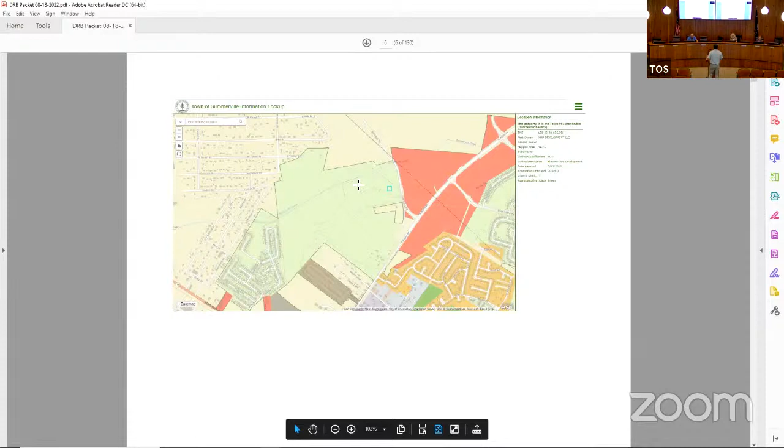So those were just a couple of observations. This is the overall location of the development. This is their information. I can turn it over to the applicant here for discussion.

Sure, so my name is Aaron Schmidt. I'm the project engineer, the project manager on this project. We're coming to y'all for final DRB. What we have here is the site layout. We've got it rendered out for you guys to show you the open spaces that we've done with the site layout. And then I can then turn it over to the architect who is zooming in. His name's Travis, for American Homes 4 Rent, and he can speak more on the architecture that's been updated on the townhomes.

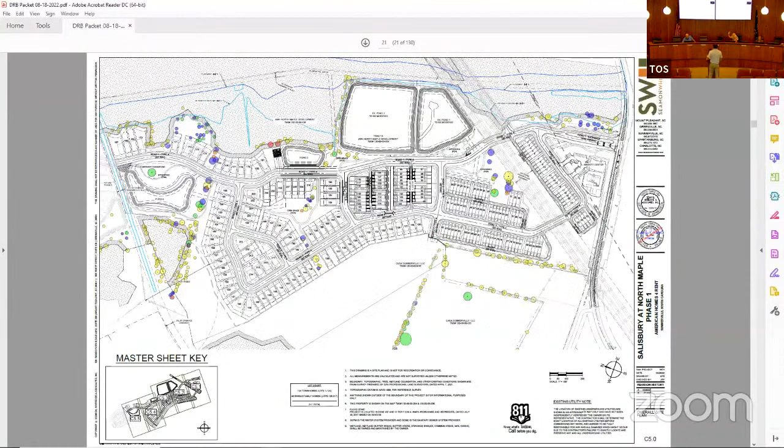Sure. Yes, ma'am. Yes, ma'am. Yes, ma'am.

So when you're coming in off of Old Dairy Road, there's a single lane that comes in and two lanes that go out, one that'll turn left and one that'll turn right. It's like a boulevard. What you're looking at, Candy, is the right of way that's through there. That's not the entry, the green. It's white up here. The amenity center is right there.

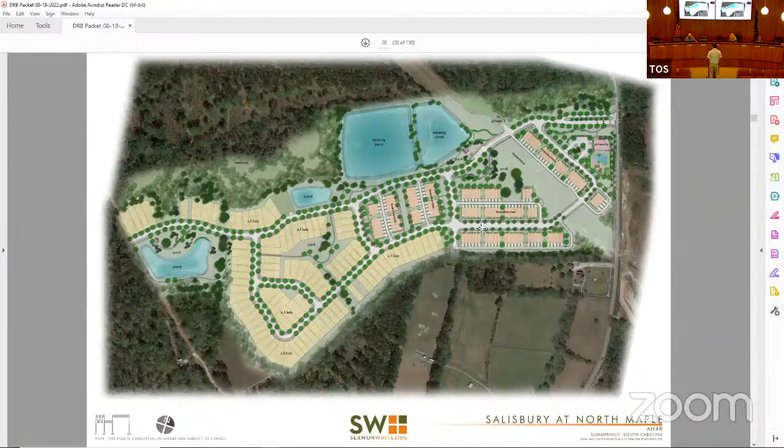And we can go to a site plan that shows it better if you want to scroll down. Go up one more there. So that shows more of the right of way and the roadway and how it's tying in as far as the entrance goes. Yeah, definitely.

So this is all site aspects. This is the planting right here, and it further defines the trail systems. We're doing a trail system around the existing ponds as well on the backside in order to allow people the opportunity to really capture this whole space and enjoy it.

As the ponds sit right now, there's already a built-up maintenance road around it that Mr. Bill Salisbury, when he owned the property, created. We're going to utilize that to just put a trail system on top of it to continue to enjoy these two ponds that exist right now.

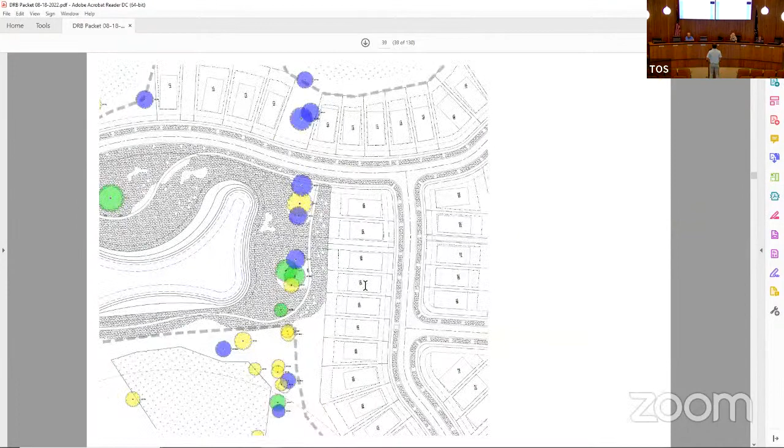It'll probably be asphalt, yes ma'am. And the reason is because we want to make this trail system ADA accessible, and one of the ways to make that ADA accessible is by using an asphalt surface. Yes, ma'am.

Do you want the townhomes or the amenity center first? We can start with the amenity center. Travis, if you'd like to go ahead and kick it off, we can talk through that and then he can explain the updates to the townhomes as well.

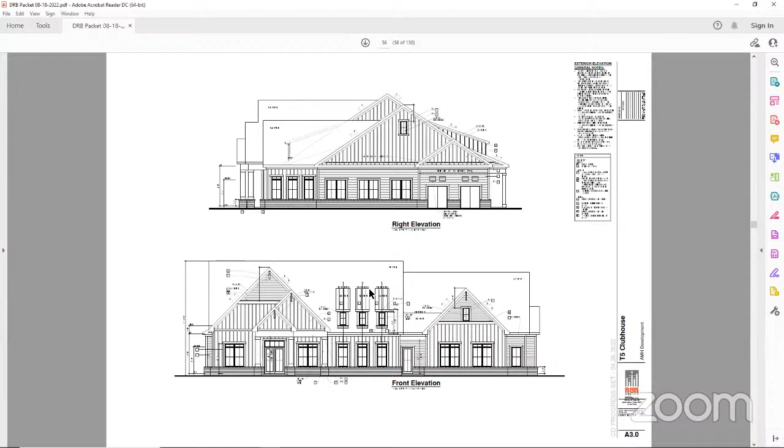All right, and this is going to be what our townhomes are going to look like. I just wanted to show, we have a sixplex, a fiveplex, a fourplex, and a threeplex.

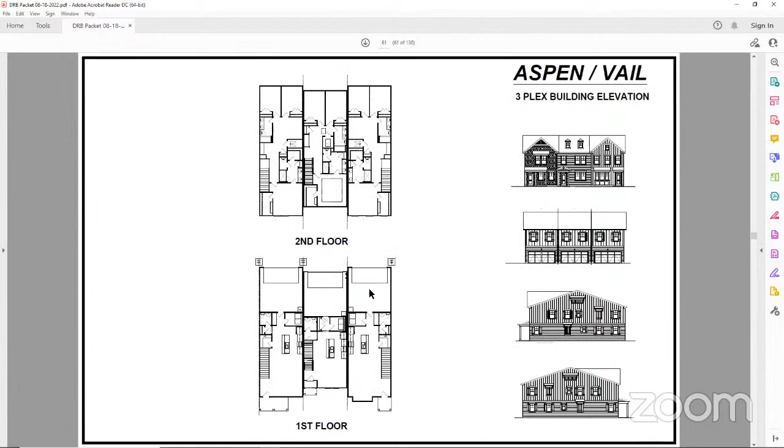Can we go to the next screen? Yep, that's your five. Just want to keep going. Yep, your three, and then here's a colored rendering of our amenity building.

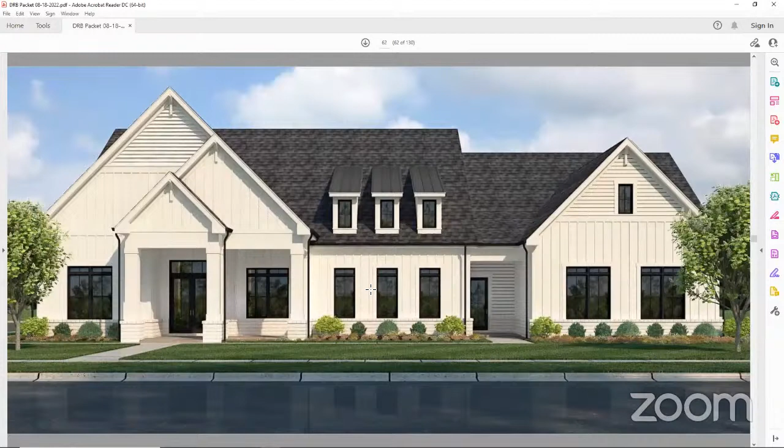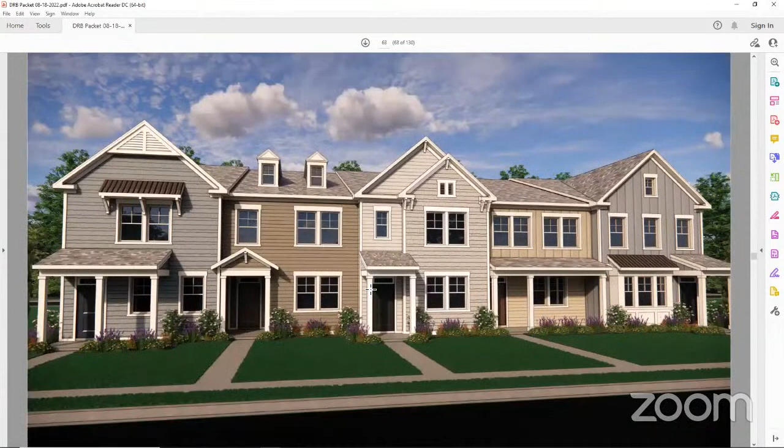Okay, so if you could stop right here. So last time we were here, we had a few comments and recommendations from the board, and so we wanted to show the new townhome design.

Let's start with the left unit. We added a lot more detail to the house. We provided a metal roof over the two windows, and we made that whole elevation shake. The porch has a nice detail with a vent that is now furred out 10 inches to give some depth.

I know some of the comments were that it just didn't feel like some of the Summerville towns. So we went and drove around and made sure we came back with that flavor, that design of nice, traditional but yet a little more transitional to give it a fairly new feel. If you look at the next unit, we have siding, and it's all cementitious.

We provided dormers to break up that roof line. Again, this porch will be 6 feet out, so every unit will have a nice sized porch as far as depth goes. And then the unit next to it, we provided some cool...

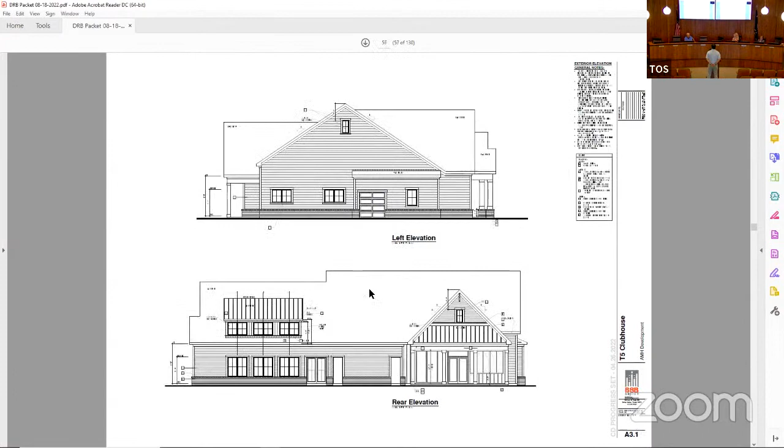For who and where, yeah. So that's white, keep going. There it is. Go one prior, back up. So I think Bill's question is, are those the colors? That's an old... the colors you see back there are part of what was originally commented on, actually.

And then American Homes 4 Rent took it and, if you flip to the next one, that's what they've updated it to. Those renderings of the amenity center and stuff were part of the fly-through shown at the last meeting.

Is this the amenity center or the end view of the townhouse? This is the new end-unit version that we updated to show more of the details of the townhouse. Yes.

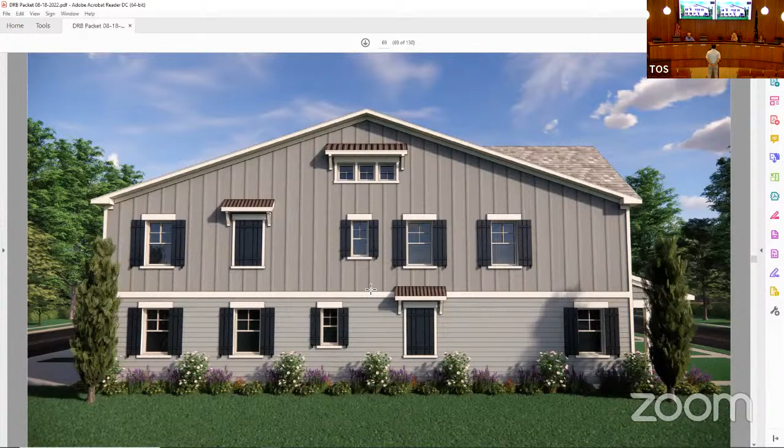One of the comments was that we needed to show a little more detail, so we added shutters that were right-sized to the window, and we also provided what we called a shutter clip, to give it the feel that it's not a real retractable shutter, but it gives everybody the idea that it could be.

So that clips onto the shutters also. We just wanted to show the rear with the carriage garage doors, and there will be shutters on the windows.

I'm a little confused about the roof colors because the amenities center roof, like you say Bill, is very dark, and this one is absolutely, totally the other way. This is a weathered cedar, I think. It's correct, it's weatherwood.

Well, I think the idea of making the amenity center different from the houses is a reasonable concept. So every building will have that roof color, all the townhouses will have that roof color, and then you've got some distinctness in each frontage. All the backs look just like this, correct?

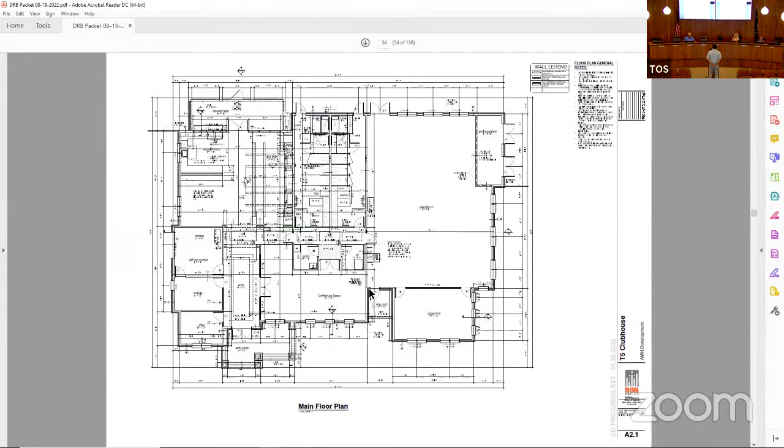Oh, and there's some right there. If you go back one more, you can see an overview of it. There you go. So you can't see it.

So the alleys are tight. Yeah, correct. So the townhomes are alley fed and they either face a property line that then has a buffer on it, or they face each other with an alley in between the two of them. Okay, yep.

But when we saw the color scheme a minute ago, none of the color boards that you show us have that light tan roof on them. That's what I'm confused with. Yeah, go to the color sample board. Before you move the slide, can we get to that?

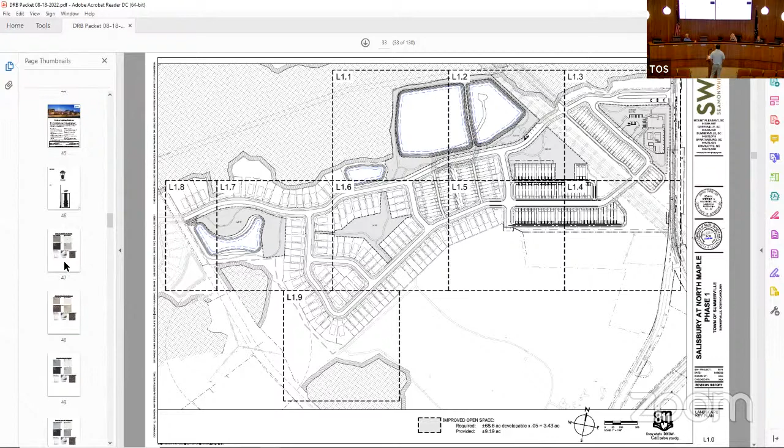Can we look at the row that's sort of diagonally on the electric easement? Which is the front on the upper, or is the- Yes, sir. So what you saw there, the back side of it, which faced the easement, that was the alley that faced the easement. And then the front of the townhomes faced the amenity center.

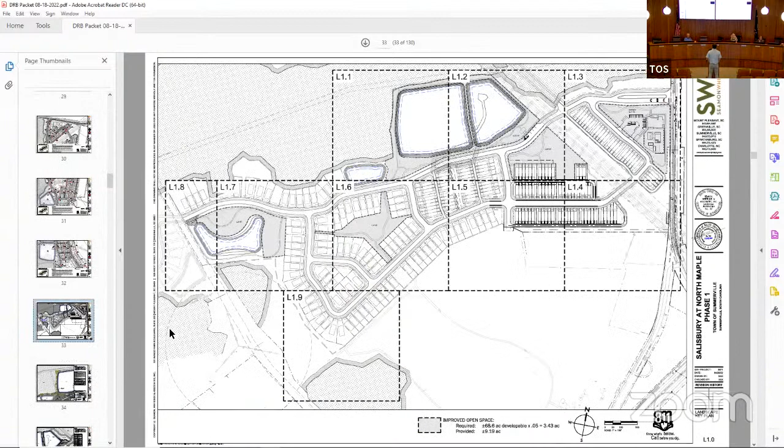So how visible is the back of that roof? If we look at the planting plan, you can see what has been done as far as plantings go, do you have enough to screen it? And I can actually allow Betsy to attest to that. Betsy is our landscape architect.

But there's some natural growth and stuff like that within the 125-foot power easement. Nothing that we're actually touching ourselves because it's outside of our limits of disturbance. But I guess it could be somewhat visible between the threeplex that you see here across the easement to the other side. When you're coming and going every day, you're gonna see that. Yes, sir.

And I was hoping there'd be some way of screening that, because the power company's gonna do what the power company's gonna do. Yes, sir. And you can't stop them.

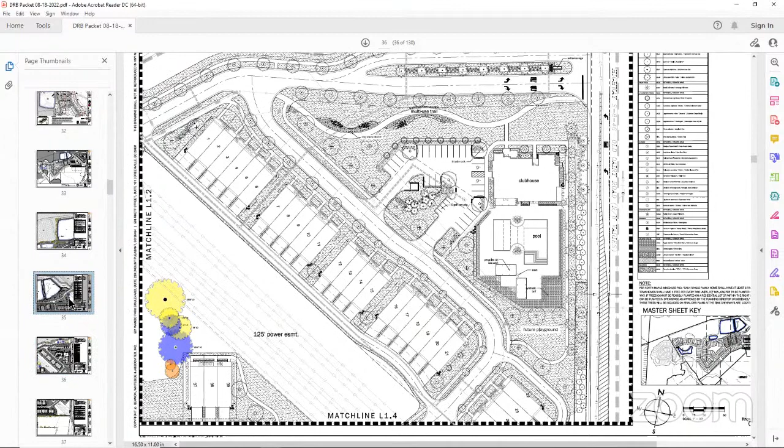Hi everyone, this is Betsy Ellingson, I'm a landscape architect. If you can go to the slide just before this one as well, you can see that there are some existing trees. You can see the yellow, the blue there, and you can also see those. So there are some existing trees, and we're also adding some planting, some lower planting or understory trees along that as well, so hopefully that will help break up the views to the backside as well.

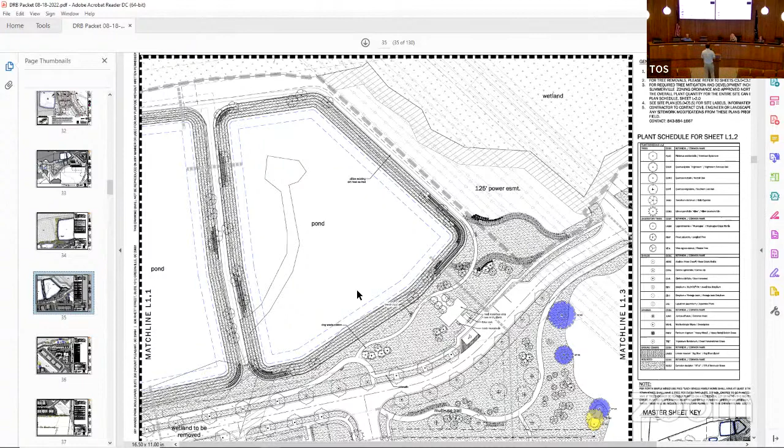I think it's one more slide, Tim. No. Yeah, I think it's broken up into those two slides. I apologize, but on slide 35 and 36, you can kind of see there on the bottom left. I'm not really seeing any planting in there.

Right, part of that was to remain whatever existing plantings were in there rather than kind of clearing everything out and replanting. But we do have some additional plants for our open space that will help block that view.

So what she's stating is the open space planned to the northwest of that threeplex will be planted. So when you're driving the main road, it'll break up the view towards the back of these townhomes. Now, when you're coming up the secondary road that loops around and ties into the amenity center, the only thing that breaks up the view there is the townhomes adjacent to that roadway, and the existing plantings and foliage that sit within the 125-foot power easement.

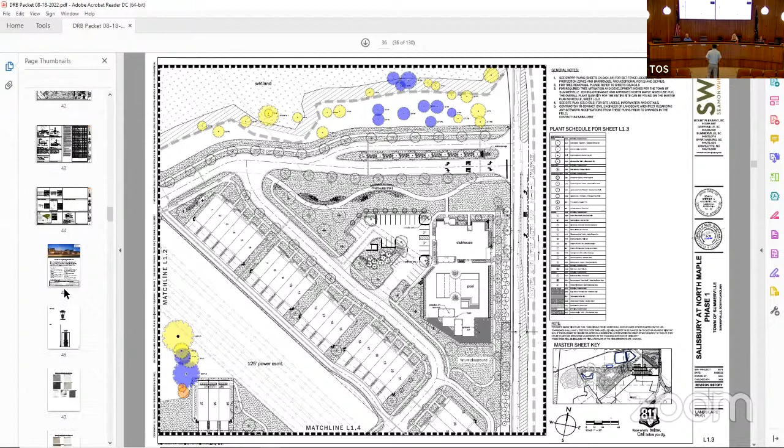Ready to move on to the houses? Let's move to the houses. To the townhomes? Is that what we're talking about? Well, yeah, do we review the individual residential houses? The individual residential, it's not the purview of this board. That's not our purview, I thought. Yeah Bill, just the townhomes and amenity center. That's all we worried about. Okay, yep, okay.

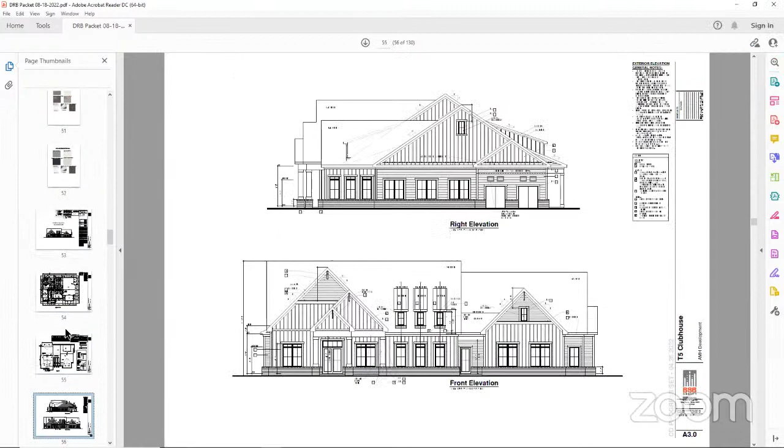And the last thing Travis wanted to touch on was the upgrade they did to the side elevations of the townhomes. Rather than just windows on the side, they dressed it up with shutters. It looked good.

I can't speak to the full architectural vocabulary, but does Chris Carpus have any comments? Yeah Chris, hey, I do have a few comments. What you got? He remuted himself. Yeah Chris, there you go. That's weird, alright, it says I'm driving but I'm not.

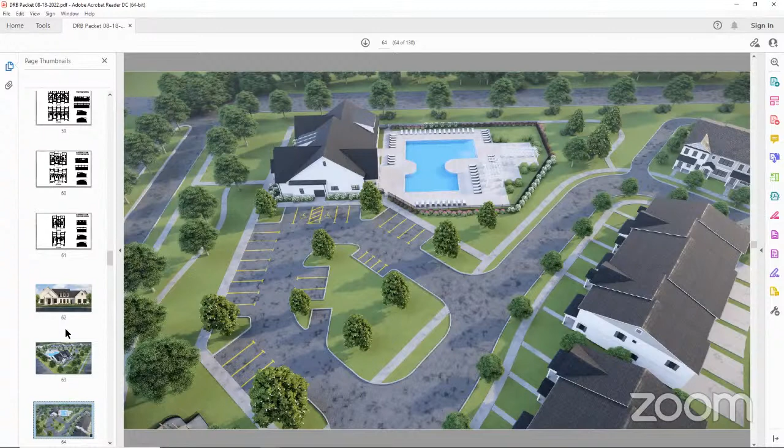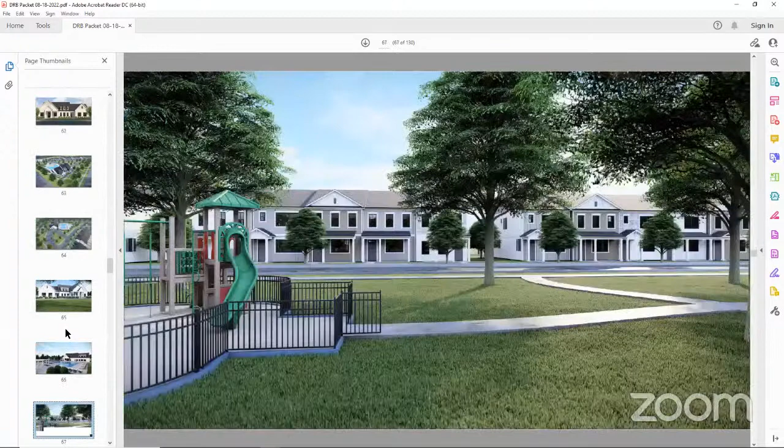So on the amenity center, I think it looks pretty good. I'm not really sure about the shed roof over the dormers on the front, it seems like a kind of long roof that I'm not sure really works architecturally. I appreciate the back side, I think it's on both sides, covered with metal, whereas the rest of the roof is just shingles. It's just a really long roof, and the building looks really good, and then once that catches your eye, it doesn't let go. I don't know if that's a great solution for dormers or not. Typically you'd see them as more of a punched opening rather than a large roofed unit, but I don't think it's a huge deal.

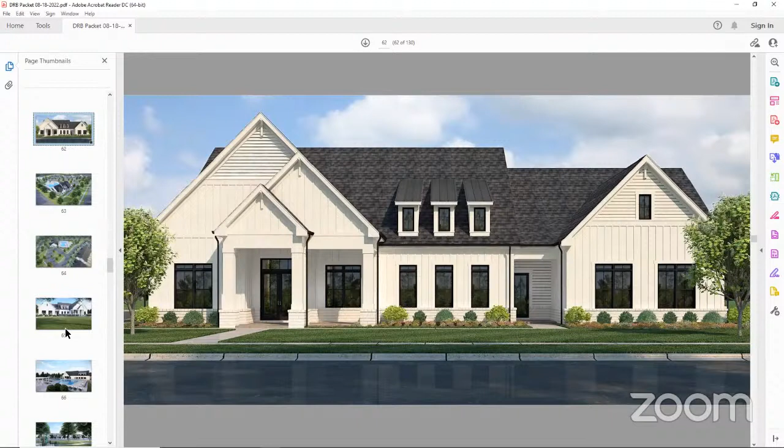That's my comment. I think it works better on the back where it's a single longer dormer than on the three individual dormers on the front. Maybe we just have a single dormer on the front like on the back. Yeah, I think the three are better because they relate to the three windows below. I don't really have a problem with the windows, it's just I almost think the one on the back can stay a shed. If you go to the back elevation, that does seem a little different, probably a 10-12 slope versus more like a 6-12. I kind of like it.

The back has much less detail than the front anyway. It's a nice look, but it's just incongruous with the rest of the building, and it's separated.

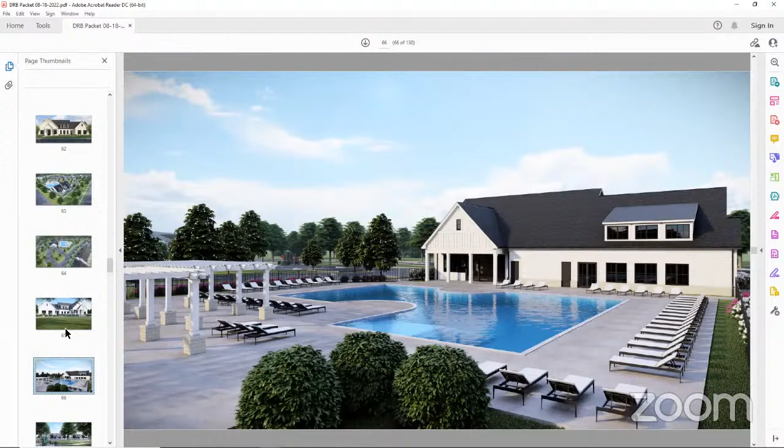So what are those shed roofs on the side elevation? What's behind there, is it just to close off part of a roof?

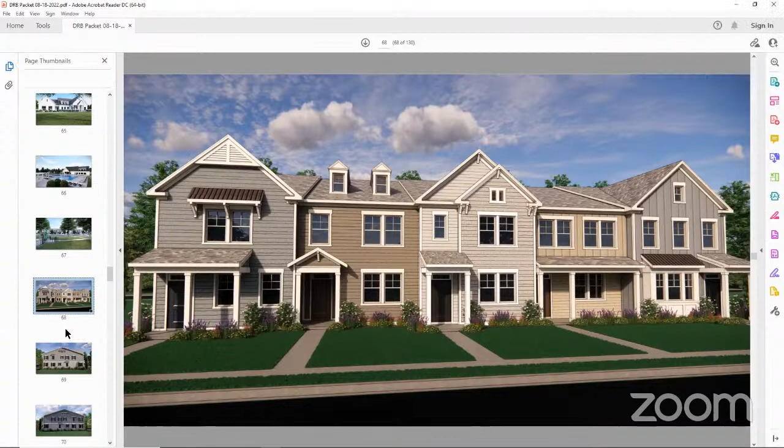But I just feel like, and I know everybody can't be a star, but when you look at the really great row houses in the US - Georgetown, Boston, and a few other places that have great townhouses, Charleston somewhat, but not as much - everyone has something special. Some of the original owners had more money so they did more stuff, but all the row houses have something. And I look at that and think, can you give them something - the dormers are a little bit of something, but that whole building is very flat. It's got the simplest, most, I'll say boring siding, because it's the same siding all the way up and down. It just doesn't seem to have anything. And that's my only real criticism of the design of those two brown units.

Just seems a little bit - I guess the one on the right center at least has a covered porch, that's a nice feature, a full porch. Maybe say, yeah, we've got a covered porch, but what does that poor other guy have that's cool? Well, they've got shingle siding, board and batten, and horizontal lap siding. No, I'm talking about the second from the left unit. Second from the left is lap siding, yeah, but it doesn't really have much - it's somebody's home.

And I think the trend I see is more and more people are going to be renting for life, especially if they have a nice rental. So this could be people in there for 5-10 years, having kids and everything else. I just feel that one unit is kind of like the dud. Can we make something nice for everybody? I think the intent here is to have all these different from each other. I mean, you could throw another porch up there, but then it's going to look like the fourth unit, or you could throw a metal roof over it and it's going to look like the first unit.

The intent is to have each of these look different. And in my opinion, having been to Georgetown, that second one looks very Georgetown-ish. I think it stands out and looks good.

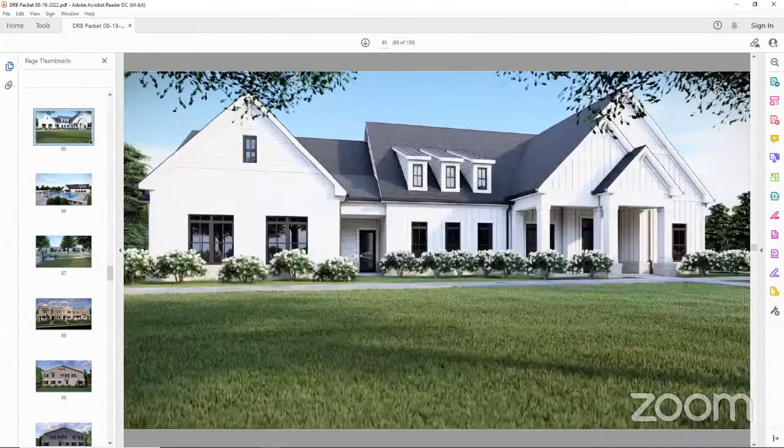So they'd have to be split units then, because there's no way you could use a package unit. No, they'd all be split, they'd have to be. Air handler in the attic and then condenser outside.

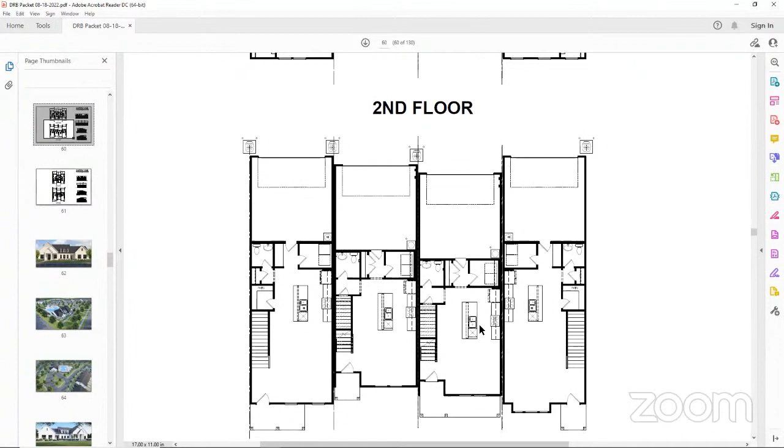Okay, and lighting in the development, is that going to be a power company function, or how are you going to handle that? So it's being worked through Dominion. We actually provided the American Homes 4 Rent selection as far as lighting is concerned. That's just kind of the breakdown of their program and benefits, but the lighting itself is what was shown on the other sheet.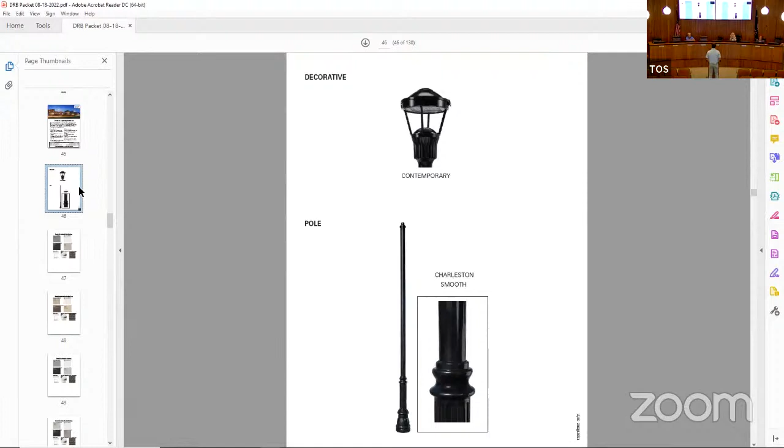The only other thing is the mail kiosk and bus stop that's provided in this package as well. Where is the mail kiosk? Can you show us that? I'll allow American Homes 4 Rent to speak to this, they actually worked with Mooney Design Studio in order to formulate this.

Go ahead, Travis. So we wanted to give something different and really fun for our customers, kind of a center point to congregate, hang out, and enjoy the space. You can see we have outdoor seating, we're going to be doing Trex wood decking so it doesn't ever rot, it'll look nice for years and years. We're also going to provide a little amphitheater seating.

And you can also see the mail kiosk, but this is more of a floor plan that points out what's going on. You can see the design of the roof gives it a little modern flair, something that will look nice in the community. We also put the lake back there so you can get that view. And you can see the design of the plexiglass that shields you when it rains sideways a little bit.

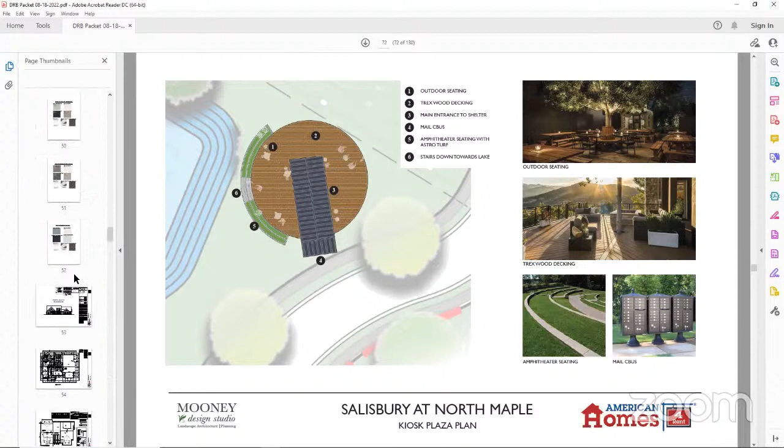I know I keep asking this, I'm just really trying to understand it. What color is the roof on the townhouses? Is it that light brown, or is it what you're showing on the cover? Right there, see the weatherwood? Weathered wood, so it's not brown, it's kind of a gray. Is that a true color or?

It's more like this one than that one. Each of these screens is different, every screen is different. Yeah, okay. You'd have to know what they look like to get an answer, because you can't get it from this.

And there's not really a great option with shingles. There's gray, there's black, and there's shades of brown. They make other colors, but they're really prolific in brown, if we're going with earth tone buildings.

It is very helpful if we have exact samples, especially for final approval. Yes, ma'am.

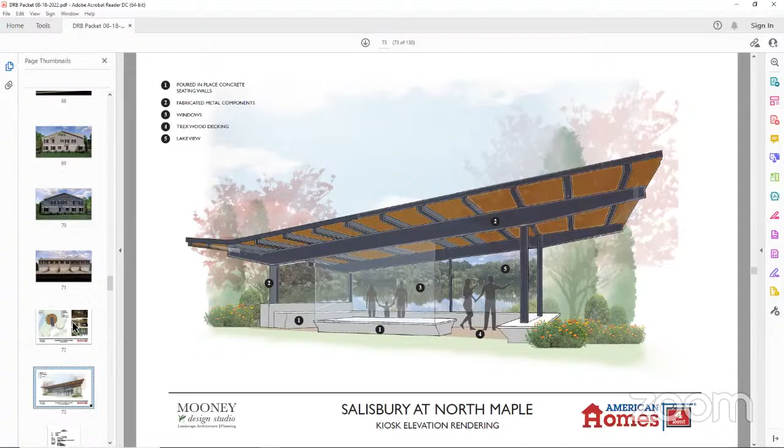They've been responsive, and it's not fantastic, but it's nice. So that's the basis of my motion.

So I seconded it. We're going to vote. Any further discussion? Ready for a vote? In favor, aye. 4 ayes, you have it.

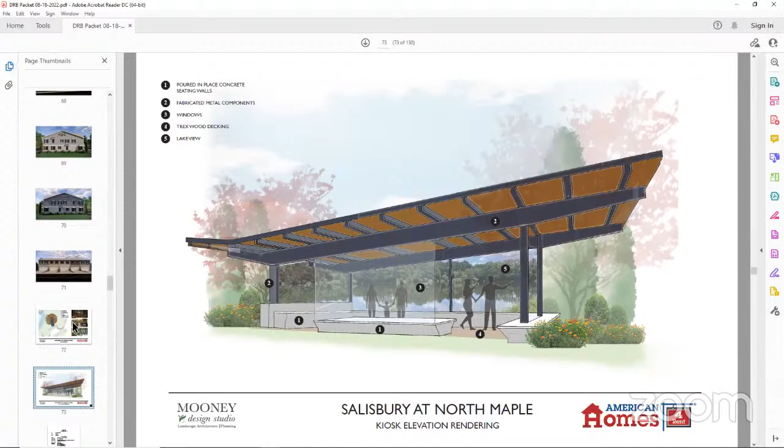Congratulations. Well, I appreciate the board for their time. Thank you, everybody. Thank you, board. Thank you all, thank you, guys.

Next, the second item under old business is a request for conceptual review of the Alta North Maple Street proposed 327 apartment development on 18.334 acres. This was, again, requesting conceptual review.

The property is zoned GB, general business. This was last at the board at the June meeting. Following your staff's comments, the site conceptually meets requirements. The proposal includes 327 units and 6 buildings, an amenity center and 8 garage buildings.

There are 525 parking spaces for 1.61 spaces per unit. Amenities include a pool, walking trails, and dog park. A grading and utility plan, landscape plan, tree preservation plan, tree removal permit, and full architectural drawings are still required. The conceptual architectural images generally meet UDO requirements and include a mix of materials.

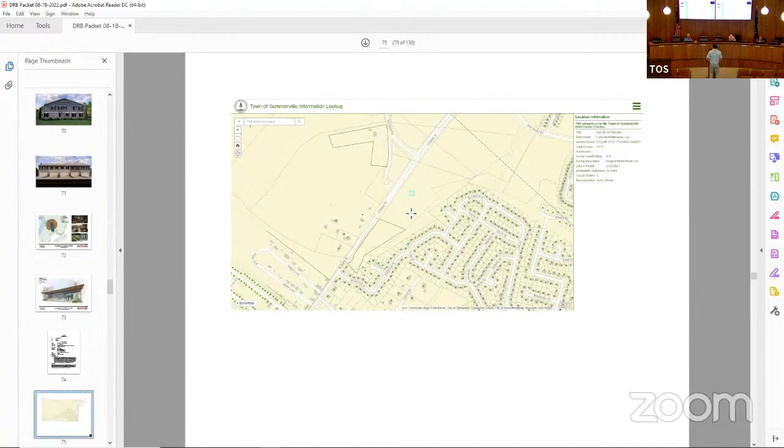Just give me a second. This is the general location, basically on North Maple Street, just south of Old Dairy, across the street from where we were just discussing. An odd shaped lot. Here's the render. So you guys are stuck with me again. This is actually across North Maple and down Old Dairy from the other development we were just discussing.

So we came to a conceptual DRB meeting back in June. Is that correct, Tim? Yes. And at that time, we received quite a few good comments from the board. So we took that and actually went back to the drawing board and really started to relay out this whole site. There is actually a site plan of what it looked like before within this set. And then we can flip back to this one just to show the difference between the two layouts.

Go back, keep going down. It might be right there. Yep, that was it. So this was the layout that we originally came to the board with, a very large 4-story building in the middle, 3 that fronted North Maple, and then a carriage style building that was also towards the middle of the site.

So we went back to the drawing board after hearing the board's comments, and we came back for another conceptual DRB because we really want to make sure that this development, we do it right, and we hear the comments of the board as we design this. So with that in mind, we can go back to the site plan. Betsy Ellingson, our landscape architect and land planner from Seaman Whiteside, between her and the architect, Mr. Glenn Allison with 2PA, they worked together to really come up with a site plan that we feel works a lot better on this site.

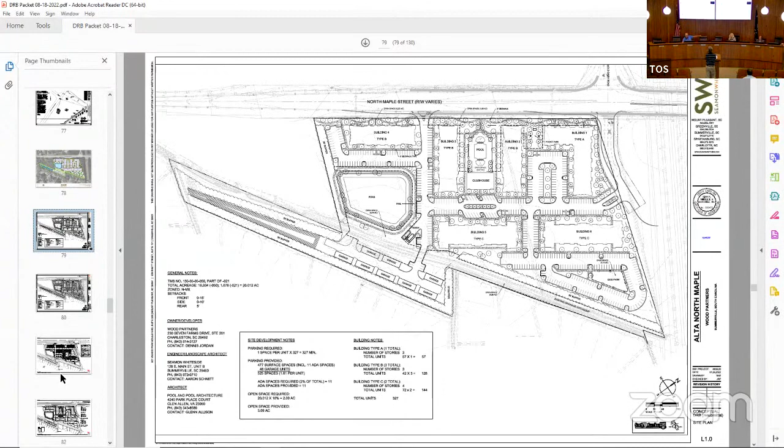Glenn Allison, I'm the architect with Pool and Pool. If you could go to one more up. Sorry, one more.

Okay, so as Seaman Whiteside said, this was the first site plan that we had, and there was concern about the size of the 4-story building, which is the C building here. So as Betsy said, we've broken that up into 2 smaller buildings, still 4 stories, and moved it to the back.

The other concern was pitched roofs on the 3-story buildings. So we looked at that and tried to come up with something that's a little more familiar in downtown Summerville. So we've gone to low slope roofs. And then...

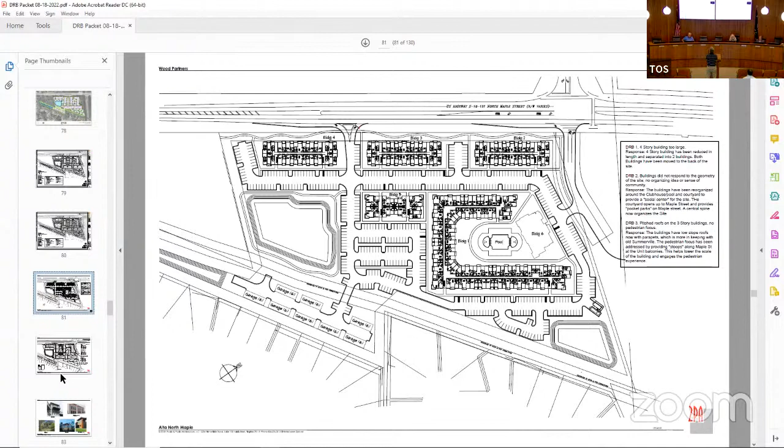The 3 buildings paralleling Maple Street here, there was concern about that. So in the new plan, we turned the middle one, or the two middle ones, in the new site plan, so the narrow end faces Maple Street and creates a pocket park. If you can go to the next slide, please.

And there you see, the other thing we've done here is, as Betsy said, was sort of anchor the corner with the L-shaped building. So buildings 1 through 4 are 3-story buildings, 5 and 6 are 4 stories, and then the club is about 2 stories, story and a half, in between buildings.

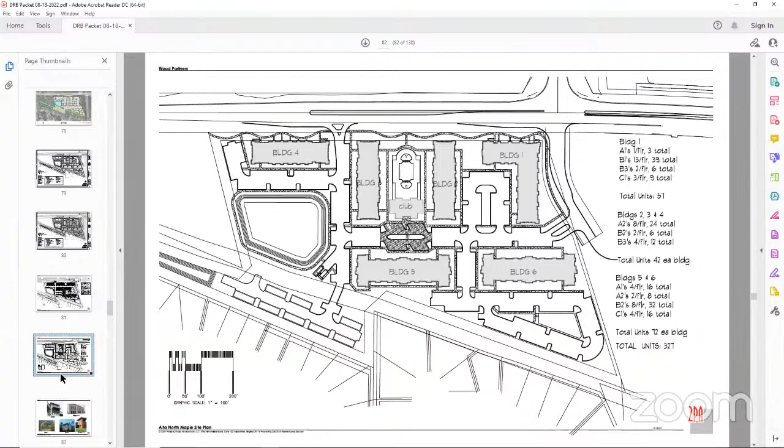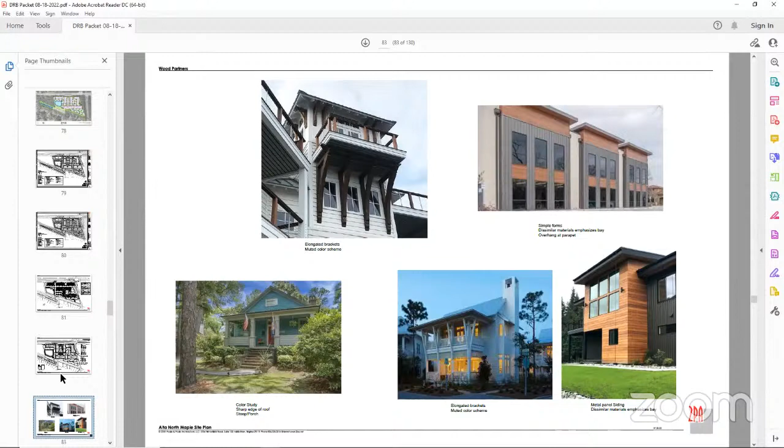Next slide. So just some of the inspiration in the bays, where different materials sort of delineate them, sort of a muted color scheme, and using different materials to accentuate the bays. Next slide.

So this is the perspective from Old Trolley Road and Maple Street. You see the corner building, the L building. And one of the things we've done to try and engage the street is create on levels 1 and 2 kind of porches, if you will.

And then as you go down the road, you see the narrow end of building 2 on this slide. And again, the biggest thing is the flat roof, so we've gone to a low slope roof, parapet line, and emphasize sort of the corner and midpoints. Again, trying to accentuate the bays and break up the buildings.

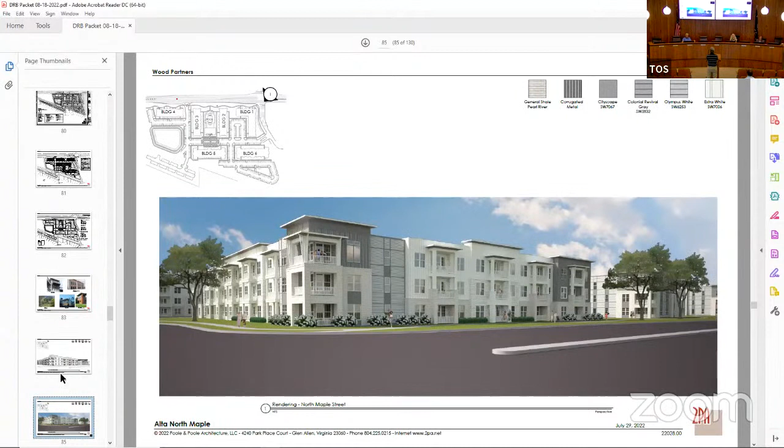Next slide. And this is just kind of an example of the muted color schemes that we're talking about, using sort of a dark parapet top to really accentuate the parapet. Next slide.

This is a perspective looking down through the pool courtyard at the amenity building with the 4-story building behind it. And again, this view here is framed by corner balconies, kind of addressing the street.

Next slide. Again, another just ideas for color. We're just asking for conceptual approval, so hopefully the next round we'll get deeper into colors and that sort of thing.

Next slide. This is the long building at the other end of the site from the L building. Again, just trying to create sort of 2-story brick to bring the scale down at the back, and accentuating the bays to break up the length.

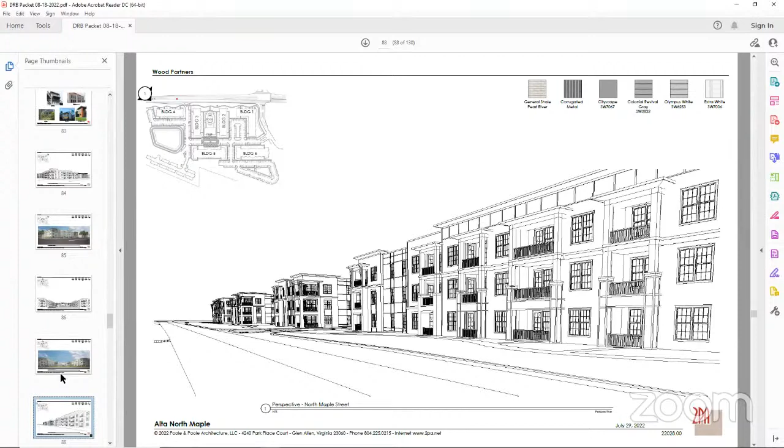Next. This is looking down the entry road with 4 stories on the left, and then the 3-story buildings on the right. The 3-story building is the end of the L building on the corner.

And then the same view, opposite end, standing close to the pond at this point. 4-story on the right, and then the 3-story clubhouse on the left.

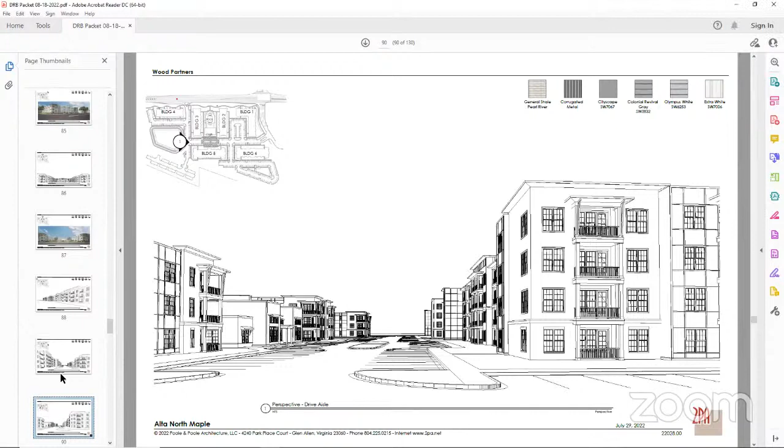And these are just elevations, flat elevations, showing the buildings as a whole. You can see the parapet's broken up, and then the expression of bays. We can go through each one of these, it's the same sort of vocabulary for each building. So with that, take questions or comments.

I think it's a huge improvement since the first one, which is great. I think from a conceptual approach, I like the look. I think you've got a lot of work to do to make it final.

But I think we could talk about some of those issues. For the rest of the board, it's an issue of do we want to go with what we might call contemporary versus traditional on this part of town. I think that's the right look. That's just my opinion. A lot of people would say no, this is an entrance to Summerville, make it look old timey. But I think this is more an honest expression that this is an apartment complex built in 2022.

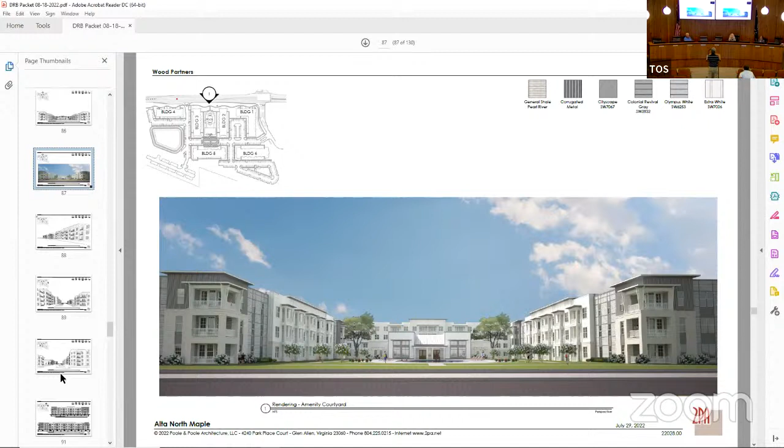Okay. Well, the pool is nice, but of course it'll be fenced for safety. I mean, we're not looking at the fence. It's big.

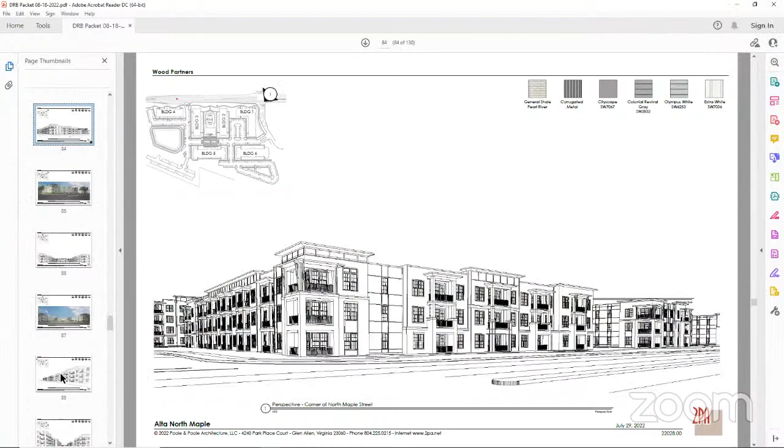Yes, there will be a linear park along North Maple with a walkway and greenery, so that will help as well. The setback from the road is about 30 feet from the right of way for that green area.

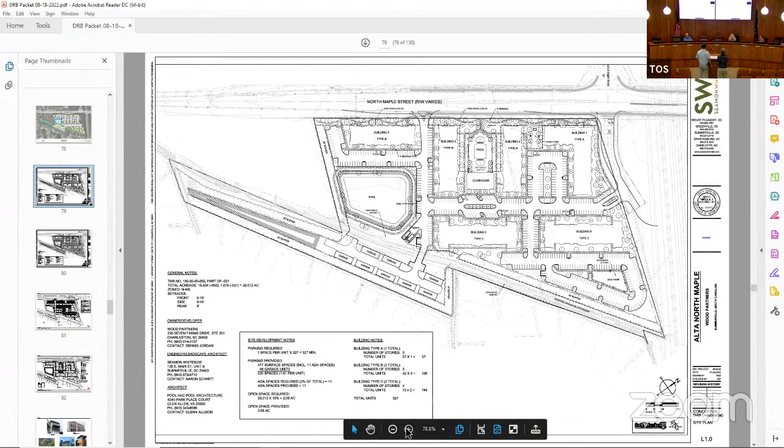Is this from the back of the sidewalk? Is the sidewalk in the right of way? The sidewalk is in the buffer - it sits within our property, within the buffer. It's about 30 feet from the right of way.

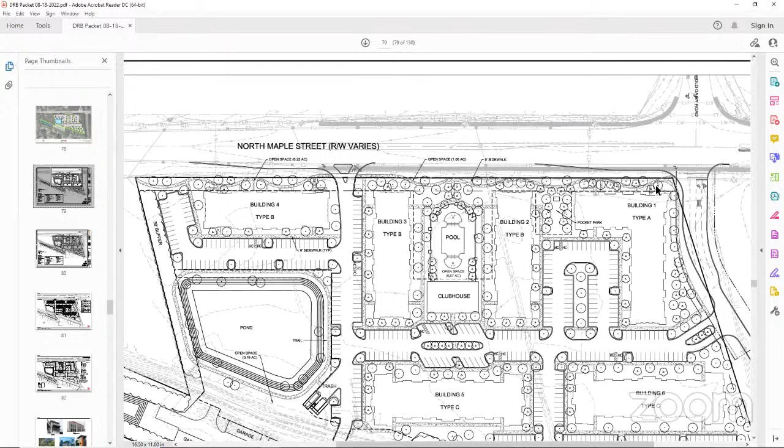So Maple Street will be 3 lanes wide there, correct? Or 4 - it's going to be 4 lanes all the way to Highway 78. So what you'll see is 4 lanes.

I don't know if they should extend that 12-foot wide walking and bicycle lane parallel with it - have you accounted for that? We're aware of the widening happening, and we're working with the town of Summerville on how this development will tie into that. The objective is to allow this pocket park to be part of the sidewalk or path that will go up and down.

Right now on Nexton Parkway and North Maple Street, they have a 12-foot bicycle walking path, all the way, not just parallel. I would expect that would be part of the 4-lane widening when that happens, continued all the way down to Highway 78. But I don't know that for sure. Yes, the path - I'm not sure which side it's on.

Is it on both sides? No, I believe - and I could be wrong, I'm not involved with that directly - but I think it's usually a path on one side and a standard sidewalk on the other. They might do two 10-foot paths on both sides. That's something to look out for, to get that 12-foot asphalt bike path, walking path tied down.

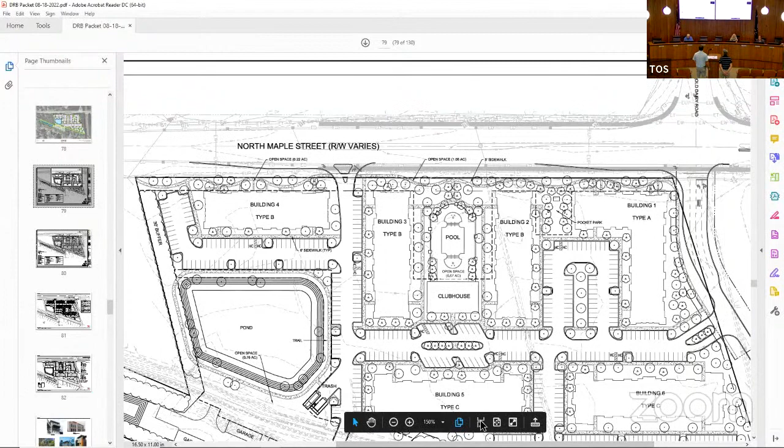If you go back to the courtyard perspective showing the swimming pool, when I looked at the back of that, it seems like that parapet's going up and down against the skyline - it's a lot more interesting. When I'm looking at the buildings on the side, it looks like just a straight line, no up and down like you have in the back. I think that view to the back is more attractive because it looks like something is coming towards you and something is set back - it's a lot more interesting.

Greg, we're looking at the 3-story building behind the pool, the amenity center too - that one is a street away that we're looking at. But the point I'm trying to make is it's not a continuous just line of parapet.

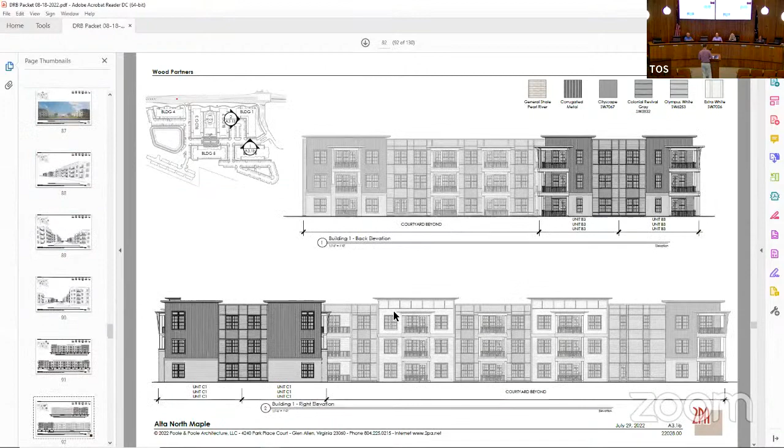So the first item under new business is, as Bill pointed out, 309 North Maple. This is a request for preliminary approval for a new multi-tenant commercial building, flex space. The property is zoned LI, light industrial. It's currently a vacant office building, and this is their first time in front of the board. This is the location - the old West Rock office building that's been vacant for a good while, as long as I've been here. Sawmill, so on and so forth. At this point I can turn it over - I should probably give staff comments.

Right-of-way acquisition for North Maple Street improvements have already been taken and all required front buffers are applied correctly. Sidewalk will be installed as part of the Maple Street improvements across the entire frontage. Proposed landscape materials meet the minimum planting size requirements. There is no minimum parking requirement for this type of proposed use, though other commercial retail uses are permitted in LI zoning. There are 107 parking spaces proposed for 54,000 square feet - approximately 1.98 parking spaces per 1,000 square feet, which is very close to the general commercial/entertainment requirement of 2 per 1,000.

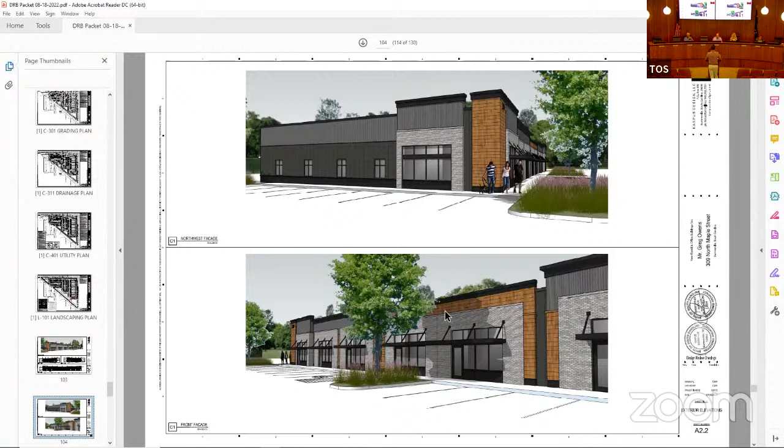At the top of this slide, you'll see we're addressing the side elevation of the building, which I think is important in context along North Maple, adding a glass storefront there and additional brick enhancement along the sides. We're also carrying some additional metal paneling along the back, along with windows to further address the side. The corner of the building carries that wood accent both on the front and the side. I understand it's important not to leave a blank facade on the side, and I think this does a good job creating the side and bringing it into the forefront of the project.

Next slide. I mentioned earlier the variety of materials you'll see at the top of this slide. It gives you also a direct head-on perspective of how it would look from the streetscape. The materials are indicated there at the top, as well as those that are in the rear.

I'd like to orient each of you to this site in that there is no through road behind this site. There are only adjacent property lines to the rear, so there's no cars other than those tenants in these buildings that would go behind this site in terms of through traffic.

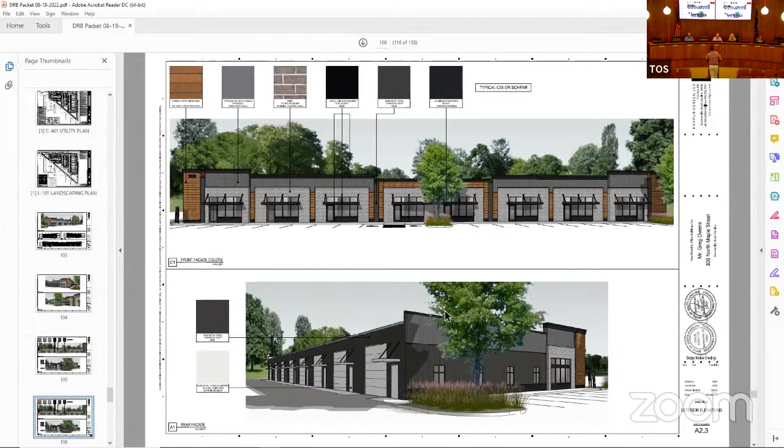This is where that old wooden building is. Is that the same site? It's brick. What's on there now? It's been used by the fire department and the police department recently for exercises.

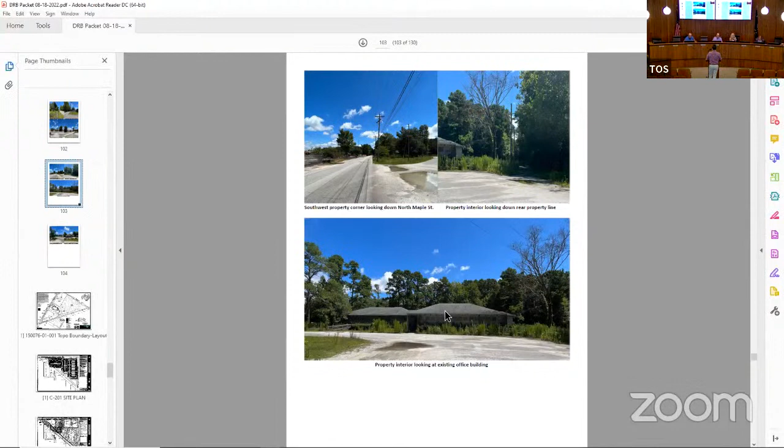And can we look at the site plan again, just to make sure? So that building is where the long vertical building is? Yes, sir. Essentially, immediately over top of it.

And then are you bumping out into, it looks like the building on the left is... Well, the site is actually an irregular shape, so that's still part of my property. We're not encroaching on other property.

Is that a power line that runs at an angle along your rear property line? Currently, there are 2 utility poles on the rear of the property line.

Tim, can you zoom out one so we can see the context a little bit? So the existing building to the north of it, is there a lot of vegetation that hides the back of the building currently? And will it be staying there? Currently there's vegetation, quite a bit all the way through here. But it's going to change as it is sold and developed.

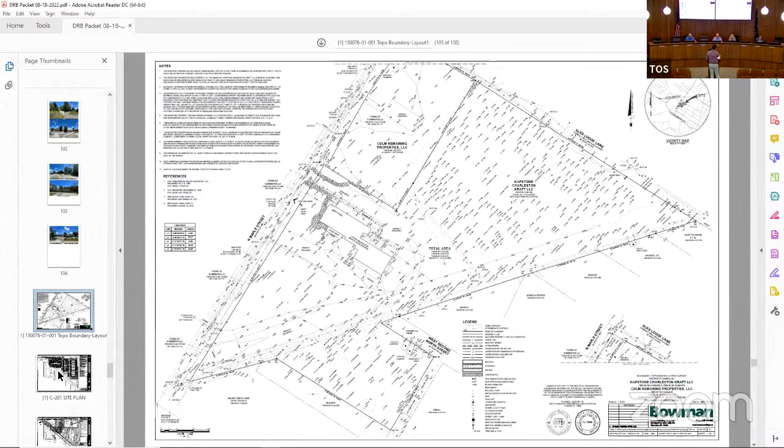Is there an elevation, a Maple Street elevation looking at all 3 buildings together from the street? Let's look at that. No, so my plan with this project is the building I'm showing you is the building that fronts North Maple and is parallel to it. The idea is that the first building on the left will be different than the 2 that are perpendicular.

And given the process of leasing tenant spaces, I'm not building all 3 at the same time. My intent was to come back to this board and seek approval for the design concepts for the second and third buildings. I've had discussions with my architect, and our intent is to carry forward the design schemes from the first building, but there are limitations since a building that fronts totally and one that is perpendicular will have different design cues and material schemes simply because they're different.

But you're just looking for approval for the one on the left, right? Yes, sir. And this is conceptual? Preliminary requested, so there was no conceptual, okay.

It's going to be difficult to get away with that rear elevation on the next two buildings. You can probably get away okay on this first building, but the second two, probably not. Yeah, can we look at that? You're gonna have to dress them up some. Yeah, can we look at the elevation again?

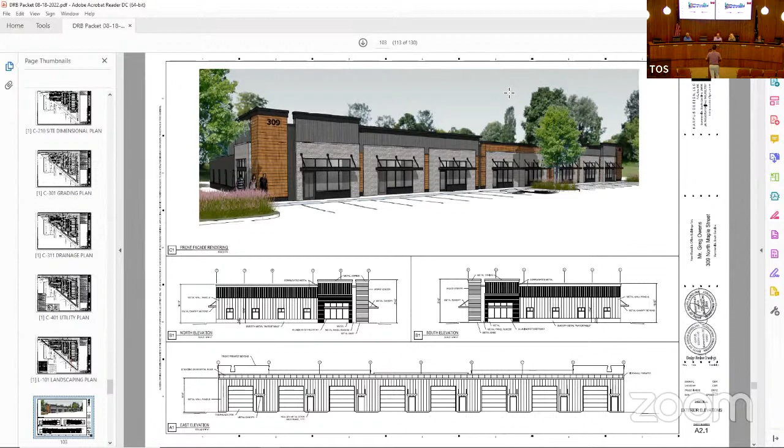I think the major issue is the site plan. I like the building, but the site plan is my major issue - I'm having trouble seeing those other two buildings without major changes. Let's talk about that for a second. Tim, this is really a question for staff - what you're wanting is to get phase one approved, sounds like. That's it. So if all we're doing is phase one, then these other two buildings we don't really even need to comment on.

We can give you conceptual comments on that, but you can't do those. You can't clear the whole site - I suppose you could take the building down, but you can't, unless maybe you're not intending this, but you can't develop the whole site and then plug those two buildings in on the right later. You can build all of it later, but you can't clear it and have the pad ready.

That's my understanding. Well, I didn't even realize this was only the one building. I was under the assumption, based on the application, that we were talking about all three, and that the architecture would just be expanded across all of the buildings.

We don't have a phasing plan here on this site. Obviously, most likely what you'd have done is the site would be cleared. The actual office building is located right here right now. Then this is a lot that will have to be consolidated with the rest of the property. And this is all just kind of wooded currently, these two on this side.

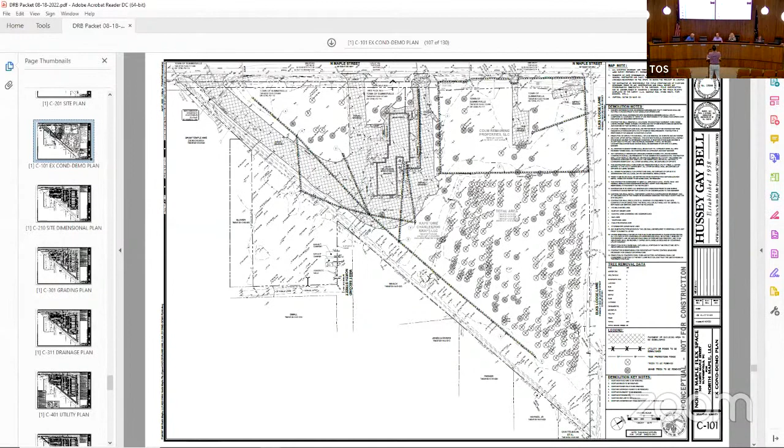My idea was that I hate to see you waste all this land back here - that's a big rectangle of land back in there. Well, what I'm trying to do, being flex space, you don't need frontage like you do for retail. So you could go in 90 degrees off the road and utilize that land. Sure. I'm also trying to be sensitive because I do have tree protection I need to address too, and I'm trying not to clear cut the site, and leave some trees and some buffer there.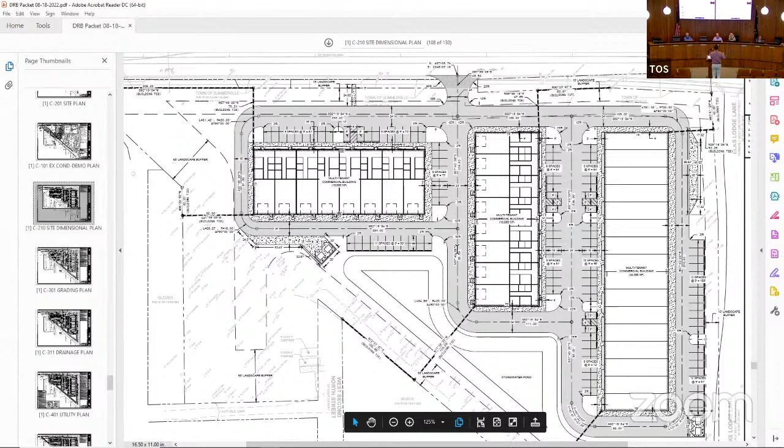To my earlier comment about the buildings - the first building and the second building are going to look different. So rather than come in here and talk about three different building designs, I mean we're trying to just get one nailed down first, understand the spirit of the committee. Then when it comes time to look at the second one, you guys can look at the first one in the built environment and say, I like that, or I would do this differently. Then when we go to do the second building, we can make those adjustments and provide a better product going forward.

Also, buildings 2 and 3 orient perpendicular - there's only 75 feet of width proposed, so there's not a lot of visual massing you're going to see when you're driving. And keeping in mind this is going to be a 35-mile-an-hour street, I mean when we drive even at that speed, we're not looking like this.

Okay, our sight window is very narrow. I'm not saying people aren't going to see the buildings, but unless you're standing in front of them, you're not going to notice them driving by. Maybe you take a glance and look back.

I think that's why some parts of Summerville look like they do, because they were designed based on the vehicle. We're trying to turn the clock back 100 years and say buildings are designed for the pedestrian. When you design buildings for a pedestrian, they become successful places to live and work. You can see that all across this country, and all across Europe. When you look at communities based around the car, nobody wants to live there.

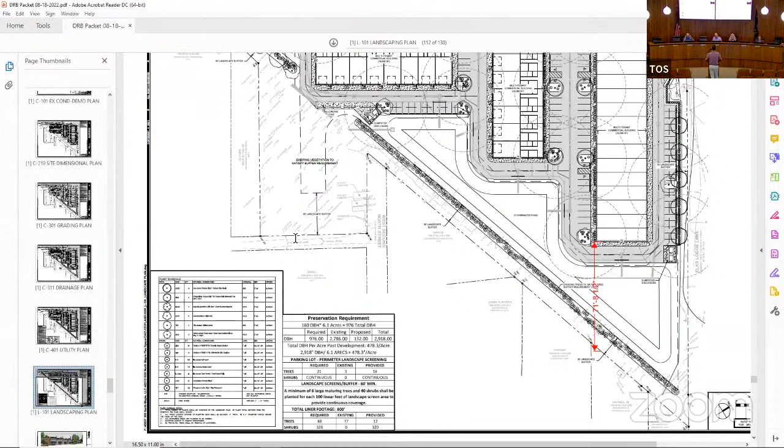That is more of a driveway, to tell the truth. That's never been installed. It's public, and that West Second North Street is not navigable. You can't go up and down that either. It's not extended either. It makes no connection.

My point is it's really a remnant right of way, left over. It was dedicated, but it was never improved. So it's not abutting residential, it's abutting public land.

But these properties here are residential, neighborhood residential, neighborhood residential, neighborhood residential. I'm specifically talking about on the left.

And they're able to maintain the 60 feet over here, 60 feet, 60 feet. This angled section, where they are directly abutting the neighborhood residential, that's where the reduction comes into question, from 60 feet to 30 feet. Anybody got any heartburn about that?

Think we can negotiate through that. Yeah.

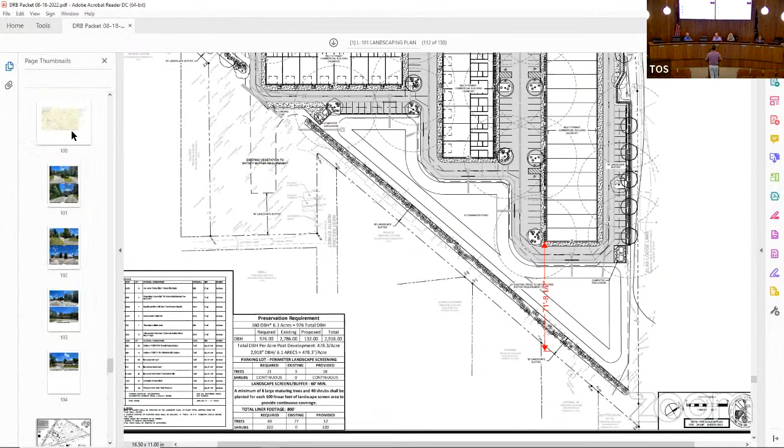I would just ask—this doesn't have to be answered today—but verify that the 60-foot requirement on the left side is actually required there, because it's technically not on... Why would it need that? Yeah, it's based on the zoning.

So if you look, this is the section you're talking about, from our map. You've got Elks Lodge Lane, this is West Second North, that would be extended through. This is, as I said, a remnant right of way that has a building in it, a connection down to First. It's not really anything, it'll never get improved. So neighborhood residential, neighborhood residential, neighborhood residential—that 60-foot buffer is required in that odd notch out.

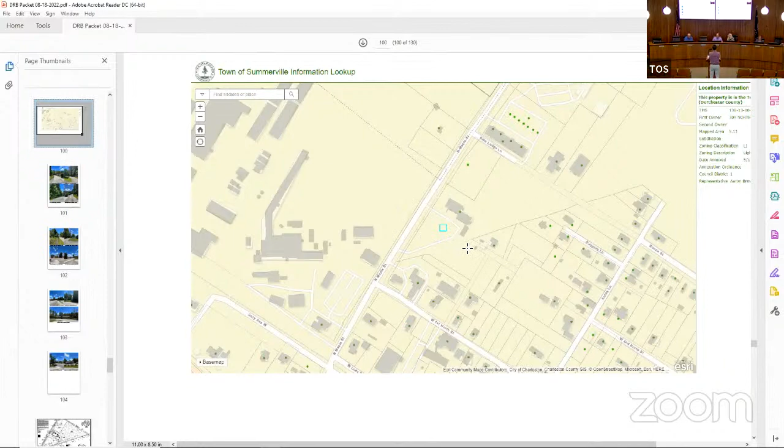What else? These are all public buildings down here. Church, community center, youth centers—they're not residential. I mean, they're zoned residential, but they're not.

All right, so we gave some tangible comments. A 30-foot buffer is fine, I think, to everybody. What else do we need to talk about?

I like the project, I like the use, I like what it could be to the community. I don't like the facade, as I've mentioned. I think you'd be better off using some wood, relate to the timber mill, acknowledge the timber mill, go with something that's light and happy and fun.

Any other comments? Okay, so we need to make a motion for preliminary approval or denial.

I'd make the motion for preliminary approval based on the comments, which means there's a lot of work to do on building elevations primarily and landscape.

What do we do about these? They're off the record. We're not doing anything with those other buildings.

Is there a second? Second. Okay, so further discussion.

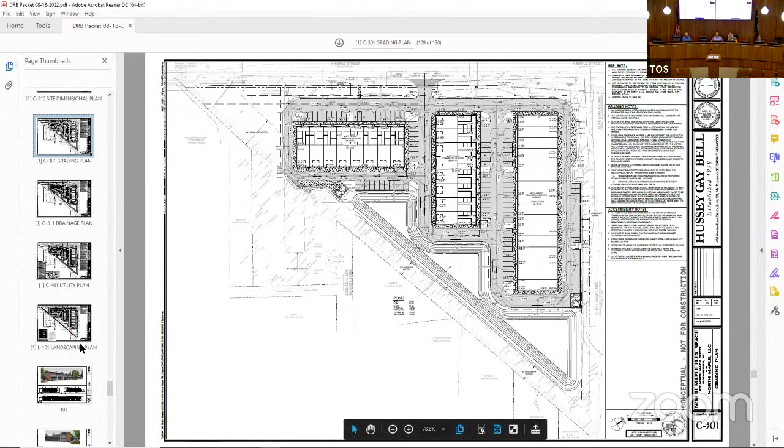No, this is a request for conceptual review, so we do not need a full quorum to actually do that. So you guys can provide your comments, and because there's no vote, it's fine.

As just detailed, this is a request for conceptual review for a proposed new two-story office building on 0.3 acres. The property is zoned DMX, downtown mixed use. This is located at the corner of East 3rd North Street and North Gum Street. This is currently a vacant property, and this is their first visit to the board.

A landscape plan, tree removal plan, and a photometric plan are still required. Parking is not specifically required to be provided in the DMX zoning district. The plan does show 14 parking spaces. Parking cannot be located in front of the proposed building.

The building is within 1 foot of the 3rd Street right of way. The proposed building meets the 35% frontage build out requirement on both the Third Street side and the Gum Street side.

Building materials include aluminum storefront windows and doors, standing seam metal roof, brick, hardy plank siding, and cast stone. Colors shown in renderings are in the packet. Due to the proximity of the building to the street, no ground sign is permitted. Wanted to throw that out there.

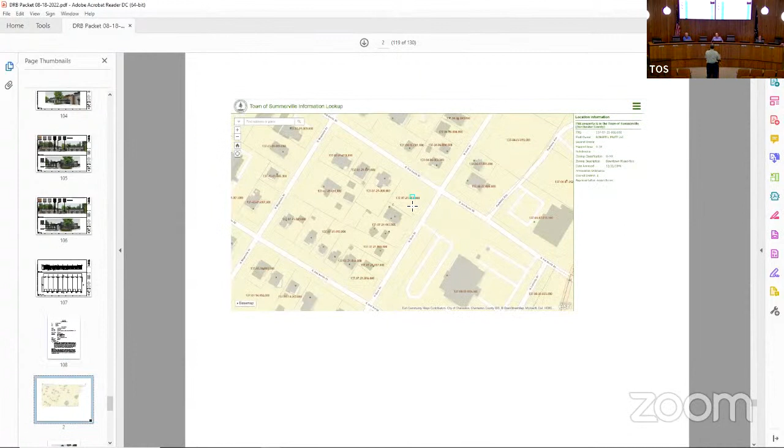So the next four-way stop heading toward Main Street is the Perpetual Restaurant with the food truck beside it. Okay, so we're on street headed to the Berlin G. The bank is pretty far away, so on North Gum there. Yeah, but so it's behind.

East Third. Right. So if you're turning at between the bank and Coastal Coffee Roasters and coming down, after going through the first four-way stop with the restaurant past Night Law Firm, then you've got a second four-way stop before you get to Berlin G. That's that corner on your right. I know it's kind of an invisible corner.

No, nothing on it, it's vacant. Nothing on the site. Yeah, shady corner, Dorchester. Yeah, there's a building there years ago. It was torn down. Dutch Slingers.

So it's across from the post office. Yes, yep, yep. Okay. Well, I've seen you around. Yep.

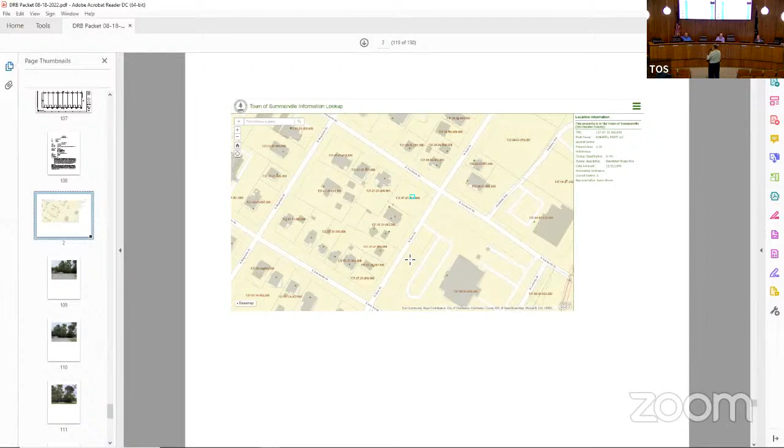That being said, a tree might be an issue. You might have issues with trees. I don't know, well, how do we make this simple? Let's get this over with. If we could go back to the old plan, I mean, leaning on Kelly. Well, you might want to let him talk then. How about we go back to the site plan?

Let me just get back to something that was said 10 minutes ago, because those buildings to the left are set back because the zoning said you shall have a 30-foot setback to the right of way. They're not there because that's what old houses used to say, or cottages. So we always threw away the front 30 feet of a piece of property to create a setback.

Well, the only way you can throw away 30 feet is if you use the next 30 feet to put your parking between the road and the building. And that's how that works. So if you pull the building to the front, you can park behind.

On a corner lot, the issue we've got here is if I pull it to either street, my 'behind' is the other side. So the parking is going to be up against the street on the other side. So the farther I move my building to the top of the page, those 4 parking spaces on the left side go away because they can't be forward of the building. So the more I do what makes sense, the fewer parking spaces the lot gets.

And how many spaces do you need? I know that's hard to predict because you don't know exactly who your tenants are going to be, but you are trying to do a lot of stuff on a small site that has a huge tree. First of all, the first 3 - because if I don't get a variance for that 4th space on the left side, the first 3 are replacing 3 that are existing on the lot next door. Okay, so those aren't even ours.

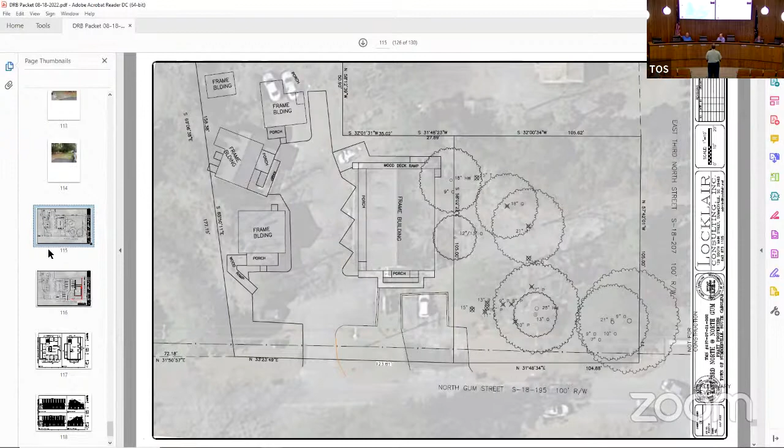If I'm being honest, I don't really like the layout, but I'm not gonna push back on it because I don't know what else you can do. I mean, that's the truth. Do I like where the building is? Not really. But you have to have parking in there - you have to have that much.

My concern, Chris, is they're trying to put too much on the site. And if there's fewer parking spaces, you'd have more flexibility with the building. How many square feet is the building?

Well, as you push the building up, you're eliminating the handicap spaces, and that's moving up, because the building bumps out there, so that starts going away. You got it single loaded. How many square feet is the building, Elliot?

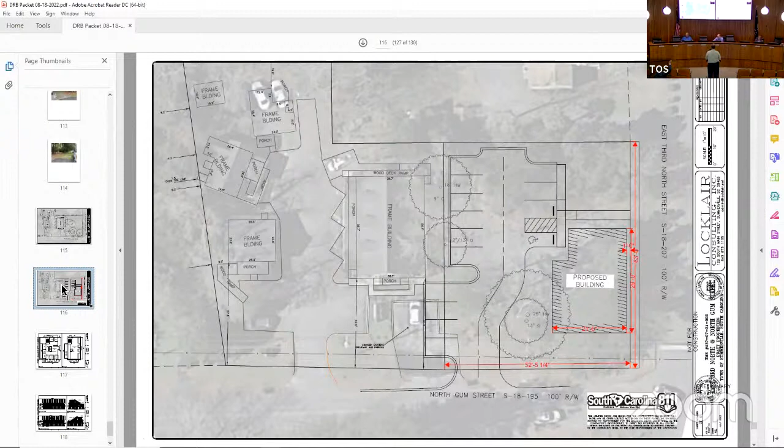I believe it's 2,000 feet on the ground floor, and that's a second floor. What's the office parking ratio? 3 per thousand? So you get 6 normally.

1,990, what it says right there. 1,990 on the first floor, about 2,000 feet basically. 1,206 on the second, okay, so that doubles it. So you're about 10, that's about right.

But if you cut off the office, data, electric, and conference room, you could slide the building up and away from the corner, made the building skinnier, longer. I just think it's a lot of building and parking for the site. Something's got to take that off the back and make the building longer.

One thing we had talked about, because of the flip flop of parking versus building, is that the entry is on the street, parking is in the rear, so everyone's got to go around. Generally you try to get 10,000 square feet of building per acre. That's basic real estate economics, 10,000 per acre.

This is a half acre or less, so you'd be looking at about 5,000 square feet. This building is going to be about 4,000 square feet. Okay, with both floors, 3,200 square feet - 2,000 on the ground floor, 1,200 on the second floor. 3.2 times 3, that's almost 10.

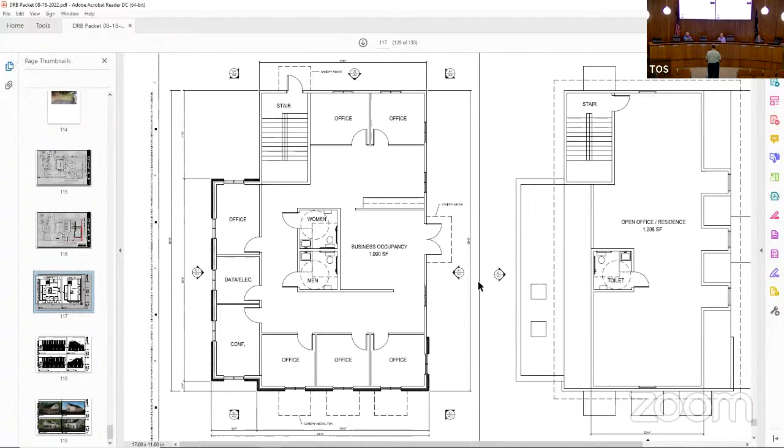That's about right. Well, let's go look at the site plan again. Because if you cut off that bump, I think the whole building could slide up, and then you could put those 4 parking spaces closer to Gum Street.

No, I think if you made the building thinner, you could slide that whole thing up, the parking could stay exactly as it is. Just slide it up, cut off the bump, make it a little longer, and it looks like it would fit, but you're still right on the property line.

So what have you gained? You hadn't gained anything. Well, again, I think you're getting back to the pattern of the neighborhood where you don't really have corner buildings unless something was built in the 70s. You're getting back to the more traditional building placement.

I would like it off the interior, but I acknowledge if you can't get into the parking, it really should come in from East 3rd North. That's where it should come in from. If you can't do that and it has to come from Gum, then you don't have a lot of good options with the parking.

I think you have the parking in the right place. So I'm looking at the right third of your site, and within that, can that building slide up or down, and where is the best place to put that? I just think it's odd to have it where it is. And DOT won't allow you to put it on Third just because there's a little residential driveway right next to it.

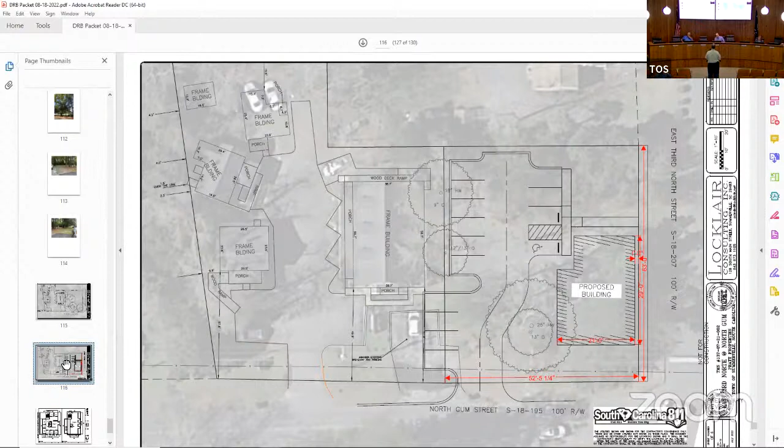All right, I mean I think y'all have done a good job. Any comments on architecture? Can we look at it one more time? It's cottage looking. The brick massing looks a little weird to me, if I'm being honest.

I think you see this all the time. I think the brick water table really is kind of a new, modern thing over the last 20 years. I don't think you find a lot of cottages that have that brick water table for 3 feet going all the way around the building. I don't know, it's just thrown out there for discussion.

Then you got vertical board and batten, and then you got what would be the vertical board, horizontal board just below where the boxing comes in. More traditional roof framing would look better, and that would pull the building down a little bit. Now the white band that's up above would be more of just part of the boxing for the roof.

I'm not sure if Chris is still on the call. No, he's long gone, you can tell. We can tell. But it doesn't look anything like downtown Summerville. No.